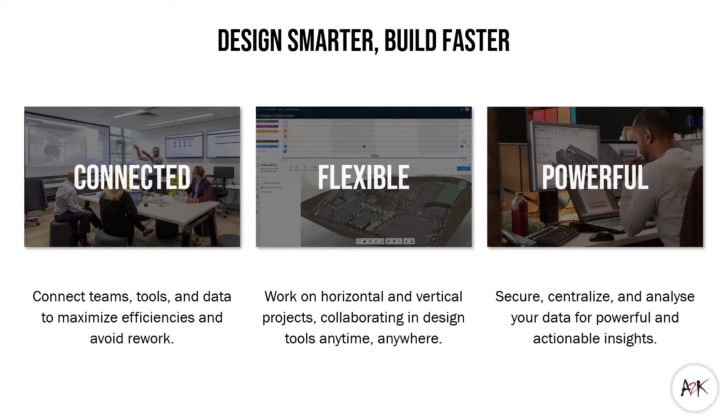Design data and BIM is in Autodesk's DNA, and they're uniquely positioned to extend the value of that design data throughout the plan, build, and operate phase, letting project data flow seamlessly across the lifecycle and making it available to teams in the right place at the right time. Autodesk's solution enables that connection to help companies move through the digitize, integrate, and optimize stages in the Autodesk Construction Cloud.

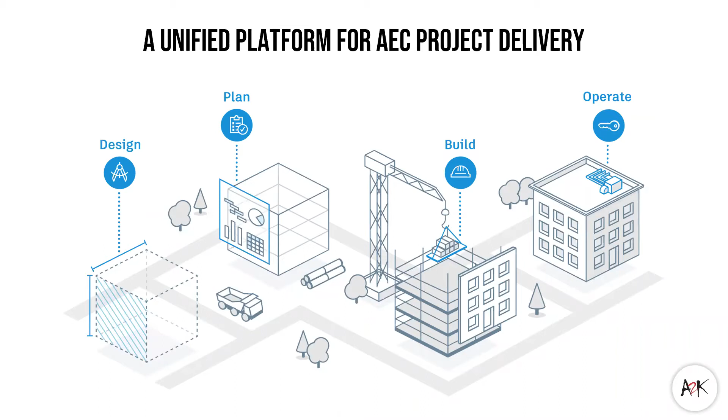And that solution comprises of several modules, connecting teams with projects and other businesses throughout the entire building lifecycle from design to operations. Our focus today is on BIM Collaborate Pro, which is part of the newer Autodesk Construction Cloud. But Autodesk also recently announced 3 new additions in the form of Autodesk Build, Autodesk Takeoff, and Autodesk BIM Collaborate.

Each of these licenses serves a different role at their respective project stages. However, they all coexist with common modules such as Autodesk Docs for document control, Insight for analytics, and of course, the administration. So let's now take a look at the features and workflows that apply to a designer using BIM Collaborate Pro, and later on also outlining what this means for existing BIM 360 design users.

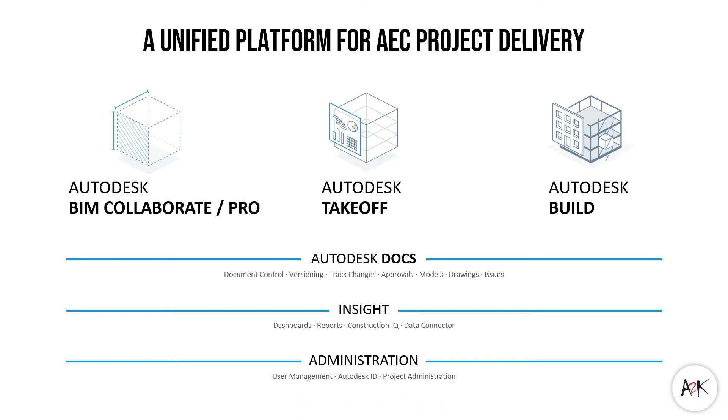So let's start this process by having a look at Autodesk Docs, which is for the document control. As we would expect from a common data environment, it is at the heart of the system that manages incoming document data for use in other workflows such as design authoring and moving it onwards for construction. Docs provides anytime access to document data so that it can be reviewed and actioned via ongoing design feedback.

As a common data environment, project teams often rely on a single source of truth to speed up the collaboration process and improve document control. This means applying a solid folder structure where documents can be published or uploaded if you prefer, protecting these folders with permissions, ensuring that data is accessed by the right users and at the right time, and never losing access to old document versions when newer versions are released.

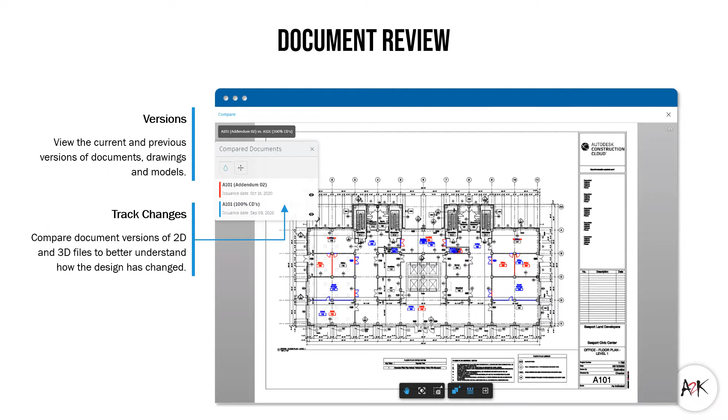And speaking of document versions, understanding how project designs change over time is critical to the review process. Both 2D PDFs and 3D models are tracked via version comparisons, meaning that project users remain informed at all stages of the design. If your concern is regarding accountability and ensuring that everyone involved on the project is completing their tasks in a timely manner, you can create issues and markups. These features enable you to pin issues in context, collaborate with common threads, add photos, assign work, and track open issues through to resolution.

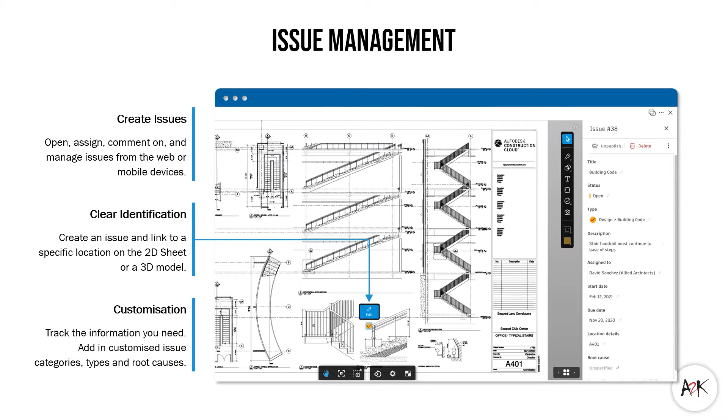All issues are centralized into a project-wide list. Using the search and filters, or just by simply browsing, this list affords an easier way of triaging the issues. And with access to reporting, those same issue details can be published to a PDF or even emailed on a recurring schedule.

Having a folder structure and permissions in your CDE only goes so far. To enhance this further, we use document workflows. Starting with approvals, this facilitates the submission of a set of documents to another user like a design or engineering manager for their review and approval so that the documents are first fit for use. Approved documents can then be released to other project users while rejected documents remain as is until they are resolved.

Transmittals create an official digital record that documents are electronically delivered to another user. These documents are typically those that are approved for use, so we can see the transmittals and approvals very much go hand in hand.

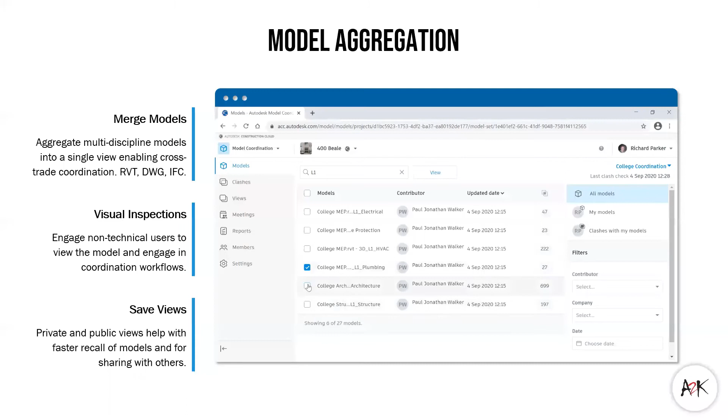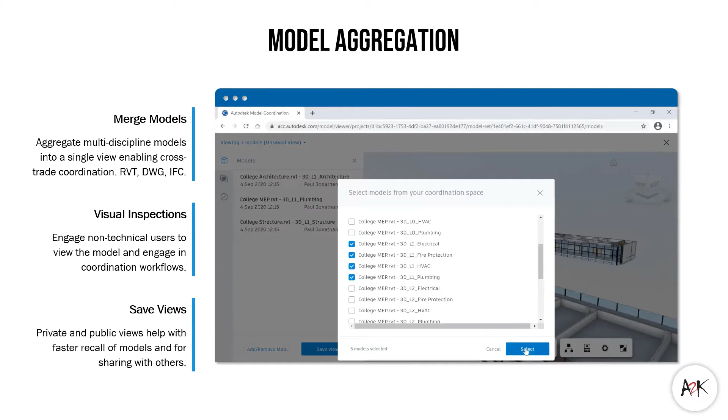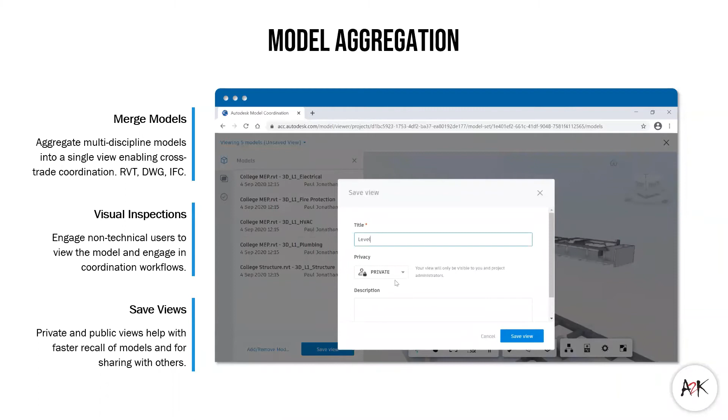These users can now visualize aggregated models from architects, MEP, and structural firms in one coordinated space. Navigate the model using zoom, pan, and orbit, and save views by model combinations or by levels. It now grants them the tools to essentially link models together, saving them as views which they can recall at a later time. They no longer have to rely on the design authoring team to perform these tasks for them.

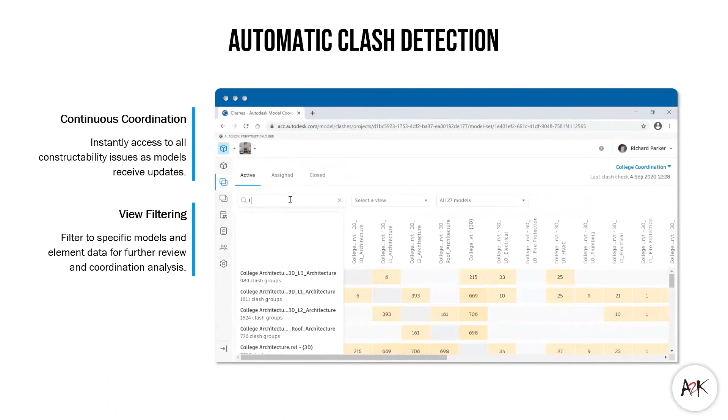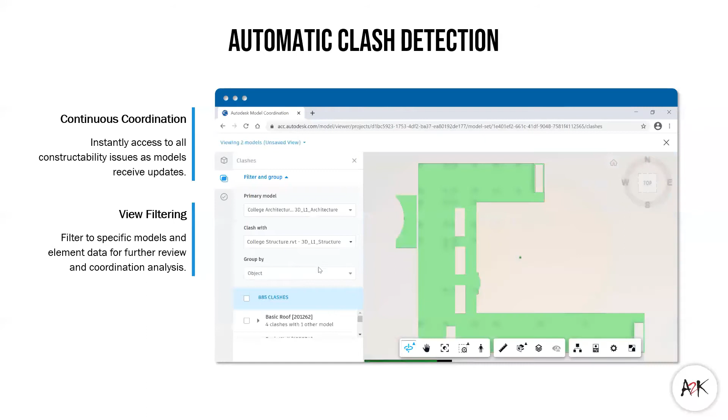It also grants these non-authoring stakeholders the power to participate in the automatic clash detection to check newly published models and visualize clashes in a matrix where they can then filter by models or saved views. They can use the clash matrix to drill down into specific clashes where they can raise issues that are assigned back to the design authoring team.

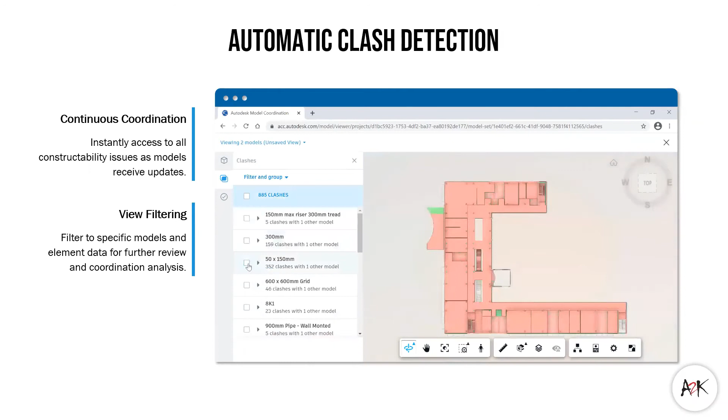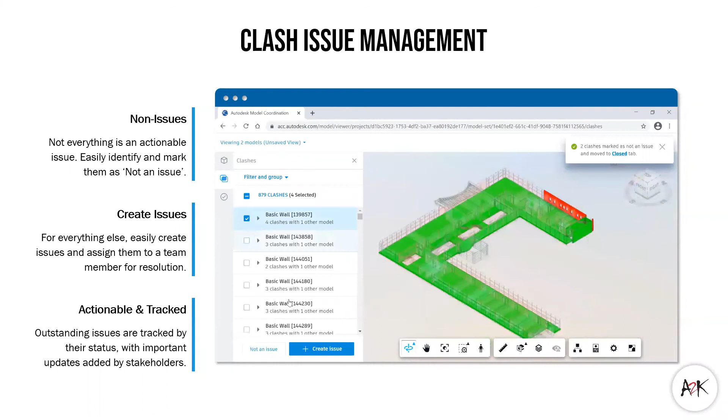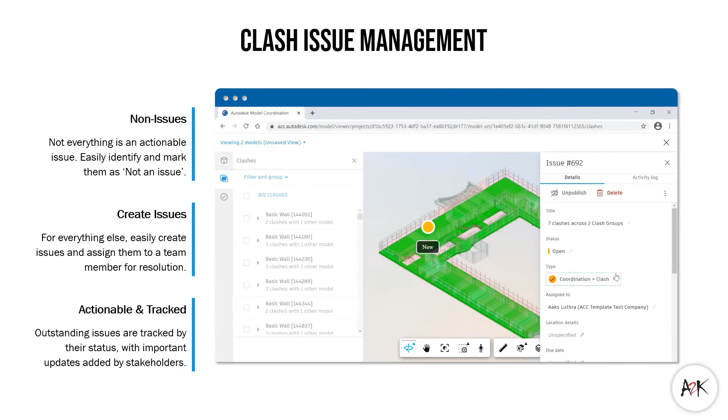And speaking of coordination issues, issue management is a key component to continuous collaboration. There's no need to wait for the next coordination meeting to assign issues to project team members. Easily tag clashes as issues, assign them to the appropriate stakeholder for resolution, as well as inputting a start and due date. Then later on, track these issues in the Insight module and follow up with the responsible parties.

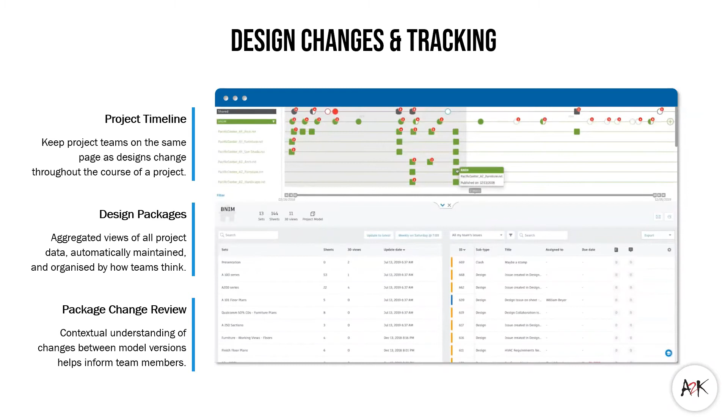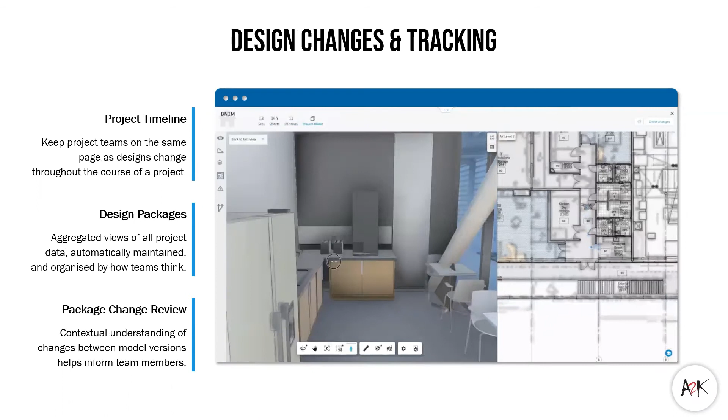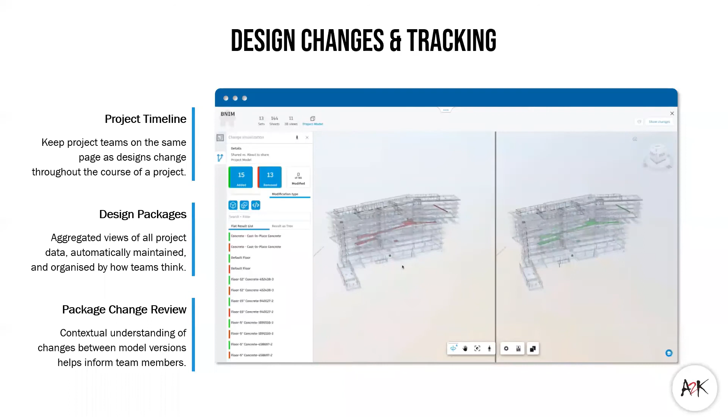But model coordination is not the only aspect that design reviewers need to monitor. As designs change throughout the course of a project, visualizing change and managing design iterations keeps project teams on the same page. Design leads from each discipline can package 3D views and sheets to share with the greater project team, ensuring clarity on what was changed and control over which designs are consumed.

Now we'll level up from BIM Collaborate as a license to BIM Collaborate Pro for the design team and their authoring process. So this is where I'll step you through the main differences and similarities between the older BIM 360 Design and the newer offerings. So to begin with, both BIM 360 Design as the older platform now and the newer BIM Collaborate Pro essentially still share the same common services.

Now, these are services that assist those design authoring products with their general design workflows, whether that means having a multi-user workflow for those that are using Revit Cloud Worksharing, or providing sequential access for those that may be using Civil 3D or Plant 3D.

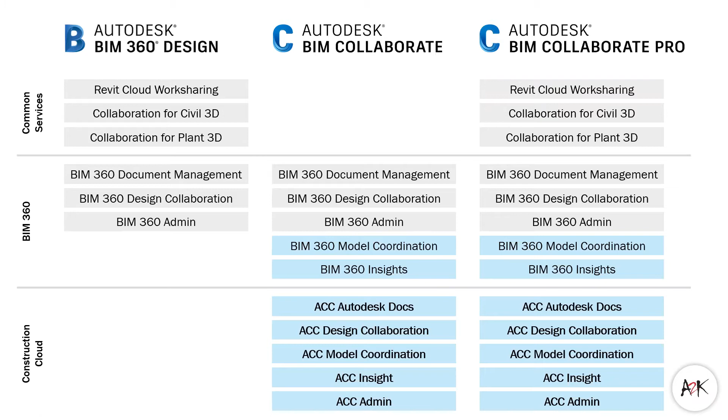Let's have a look at it maybe a slightly different way. So rather than listing out those licenses with the features, what about if we look at it just in regards to designers, those that are authoring the information, and those that simply need to review it? This simplifies the approach, where we can see the designers come in at the BIM Collaborate Pro level, which integrates with their authoring tools, either Revit, Civil 3D, or Plant 3D.

For those other people that are just considered reviewers, they can come in at the Autodesk BIM Collaborate level. And we saw those features before, where they can now review the design authored information. And also something we haven't touched on, and won't touch on moving forward, is the fact that the AEC Collection as a product suite also now includes a lower, more entry level, being Autodesk Docs. And that'll simply provide access to the CDE so that they can access documents.

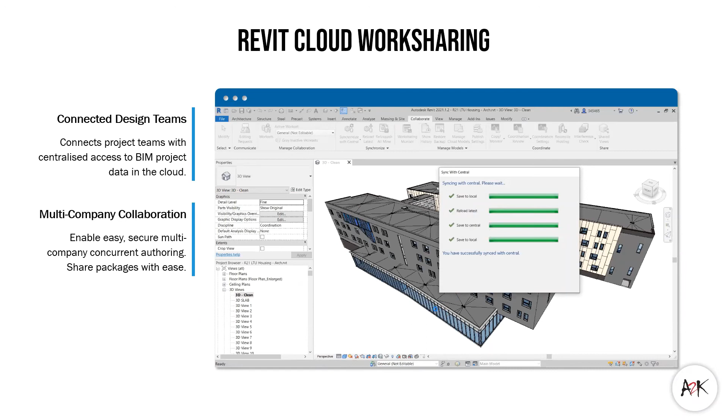We've heard recently that in the near future, Autodesk Docs will also be available to purchase as its own entry-level license. So BIM Collaborate Pro adds powerful Revit Cloud Worksharing technology that enables real-time Revit worksharing virtually anywhere, even with the most modest of internet connectivity.

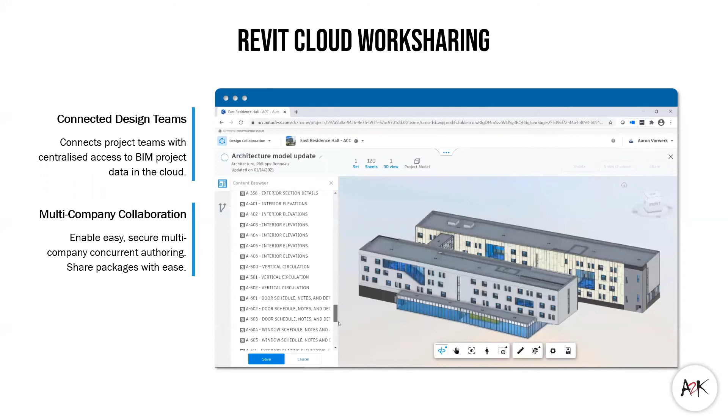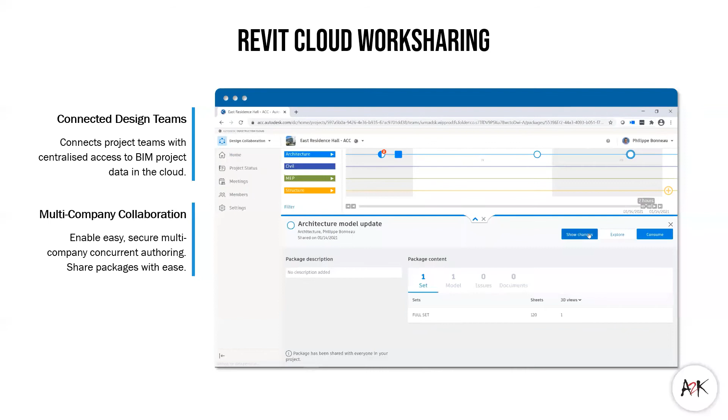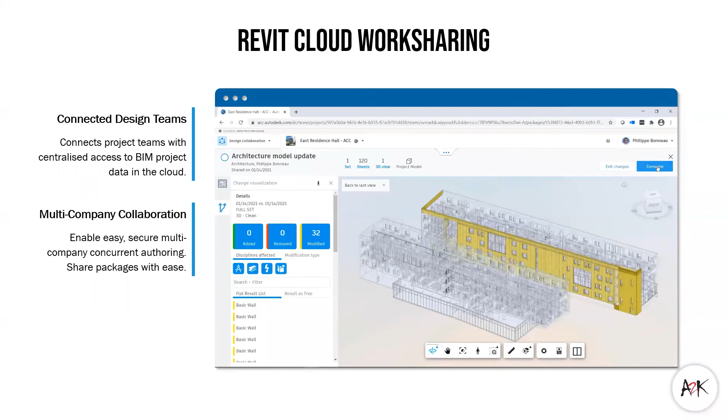Revit models are synced to the Construction Cloud platform. From there, files are packaged and shared to other design teams. This can include both models and sheets, depending on what needs to be shared. Those other design teams then view the contents of the shared data and then optionally consume it into their own design workflow. This process ensures that design files remain on the platform without needing to be constantly downloaded and uploaded.

And for both Civil 3D and Plant 3D, the design integration follows a simpler workflow. Both design authoring products connect natively into the platform, ensuring users are working from a single source of truth, with automated file locking that helps to control sequential file access.

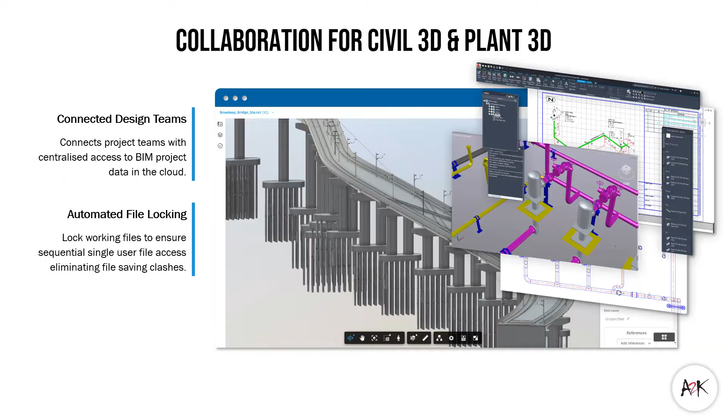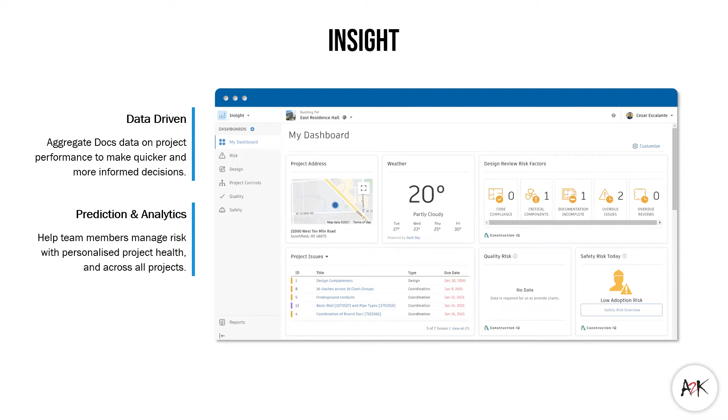All right, so we're going to take a brief live overview of some of these features. With numerous attendees online today, I'm sure that there are going to be many that have never seen the newer Construction Cloud or even the old BIM 360 workflows. So some of this hopefully should be some good new information to get you introduced to these platforms. And for those already on BIM 360, this will no doubt give you a better feel for some of the subtle differences that come with the Construction Cloud.

So I've just changed over to my web browser. I'm running Chrome, because both BIM 360 and the newer Autodesk Construction Cloud are very much browser focused. I've got a range of tabs open across the top with some other features that I'll get to in a moment. The first thing that we see when we log in is most likely going to be the document management space. That is Autodesk Docs. This comes with the AEC collection with BIM Collaborate and BIM Collaborate Pro.

We can see our menu system on the left-hand side that gives us access to a range of other features if we choose to use them. But the crux of Autodesk Docs is going to be regarding the project files and their folders. Here we can see that we've got a customized folder structure that I've already created for the project. And within one of these particular folders are some working folders and corresponding files. Here underneath the architecture working folder, we can see the architectural Revit file, and the same would be underneath the services and structure.

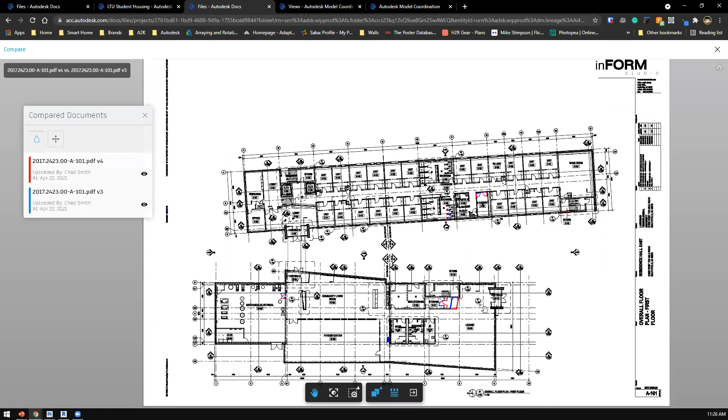I have one of those drawings open in a different tab here, this being just a PDF, not a Revit model. But we can see here that when the two versions are selected, those changes are highlighted by way of the red and blue line work on the screen so that we can understand what changed between version 3 and up to version 4.

If this was a 3D model, on the other hand, not only would we be able to see the changes, but we would additionally be able to see how things have changed, whether elements were added, whether they were removed, or even if they were modified. And not only if they were modified, but how. Did they have their data changed? Did its location change? Or maybe its shape was changed. So both 2D and 3D share a very similar design comparison process.

Let's close that. Now, coming back to my document space here, where we're interacting with our 2D and 3D information as well. One thing that I didn't previously show you was when the design teams were sharing their designs between each other using the design collaboration module, they are doing so in this shared space. And again, this is another location where designs are released so that they can be consumed by other design teams. It's on this particular folder here with its subfolders that I've previously set up what we call a coordination space. And this moves us into the model coordination process.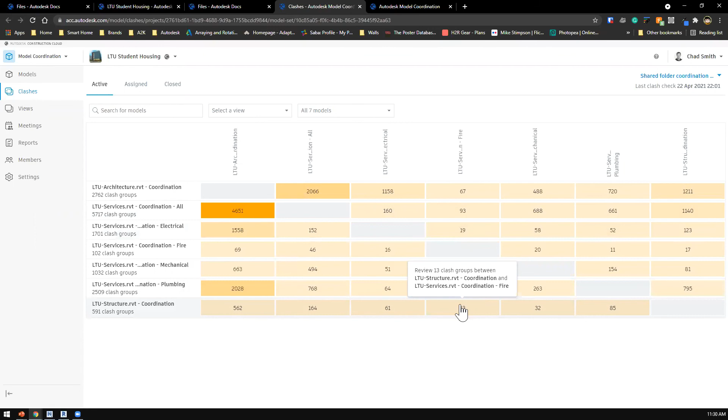I'm not going to come into the models by way of this matrix because I want to show you one more tab over on the left-hand side here, which is the Views tab. Remember I mentioned a moment ago on the Models tab that we could put different models together. Well, those different combinations we can ultimately save as a view so that we can recall them far more quickly than having to select them time and time again.

So I'm going to jump into the structural and mechanical view, which has those 2 models saved together. Now we just need to give this a moment to load this particular view. Oh, hang on. In fact, do I still have it up? I still have this open on this other tab here, so that's good.

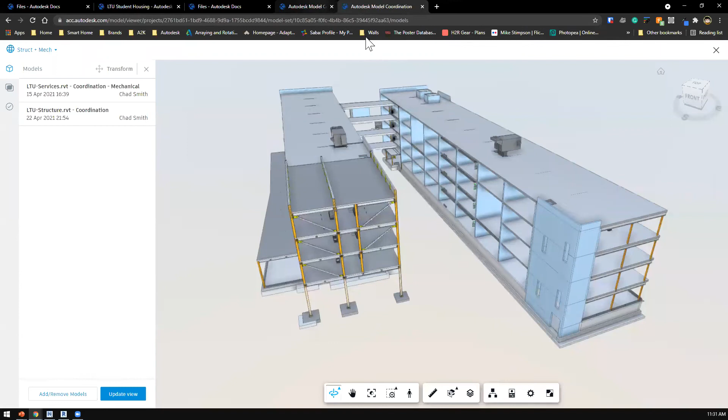All right. So here is a preloaded view of both the services and the structural model. This gives us both of those models overlaid so that we can at least do a visual inspection. Now, remember, previously I said that this is available to the BIM Collaborate users as well as the authors who are using BIM Collaborate Pro.

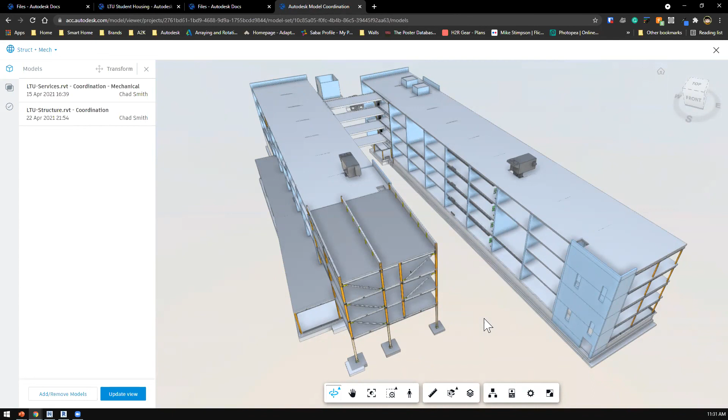It too provides us with a list of actual clash results, which we can then use to move through and identify where these clashes are occurring so that we can ultimately select them and create an issue, which can then be assigned to the responsible party for resolution. Again, this page is probably just timed out because it was preloaded.

Any coordination issues that are raised then fall under the global issues list so that the entire project can review which issues have been raised. Now, one of the nice things about Construction Cloud is its integration into both the design authoring process and the model review process as well. So since we're here on the clash results, let's jump over and have a look at Navisworks.

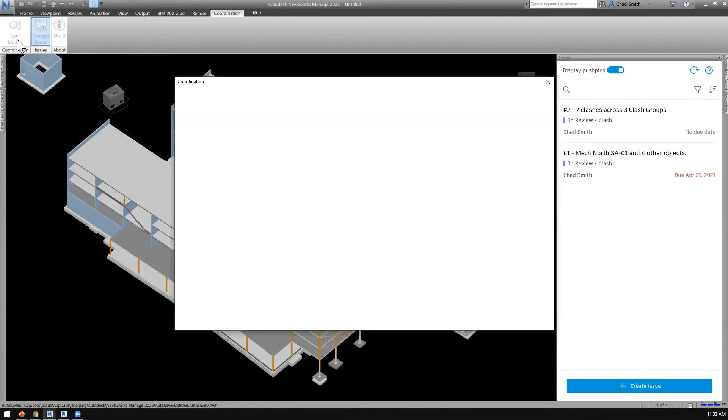Navisworks, with an additional add-in installed, gives us access to firstly open models directly from the Autodesk Construction Cloud. Now, I'm just going to give this one moment to load, and here is that same project that I have open over in my browser. And we can see those same models that I can select, just as I did a moment ago. They also contain the views that we can use as a quick selection to open, of which in the background, I already have the structural and mechanical opened.

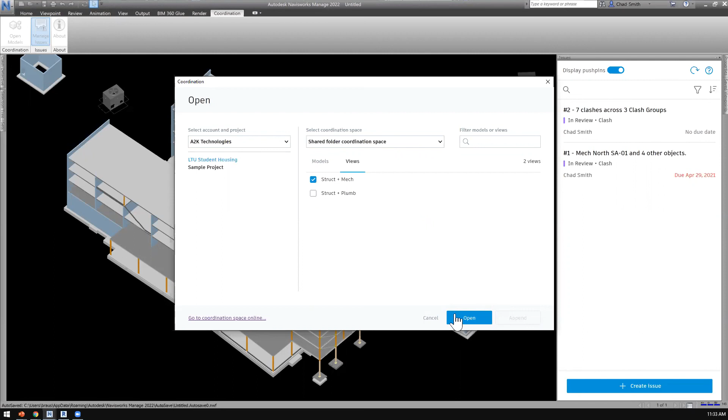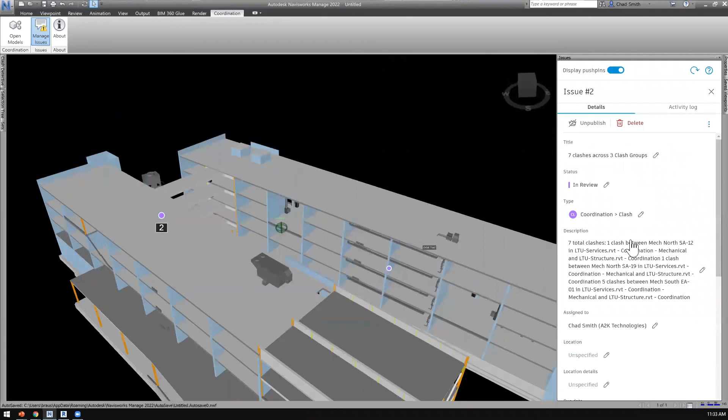And now with the issues panel open on the right-hand side, we can see where those clashes are occurring. We can select them from the issues panel, view the details, and if we do reach a point where this issue or this clash has actually been resolved, then we can go ahead and close it out. It's just a way to bring that clash information from the web browser through to a desktop design review tool like Navisworks. And this also includes the design authoring process as well.

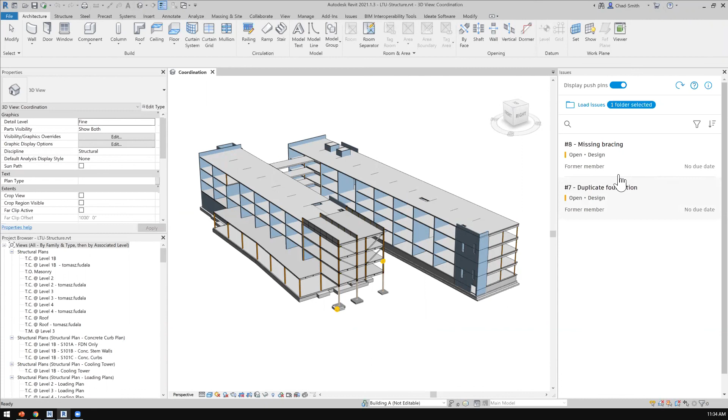So here is Revit, again, with the structural model open, and with the BIM 360 or Autodesk Construction Cloud add-in installed. In this case here, we're simply looking at design-related issues, not coordination issues like we did a moment ago inside of Navisworks. Again, we can see where these issues are by the markers on the model, and we can go ahead and select those issues.

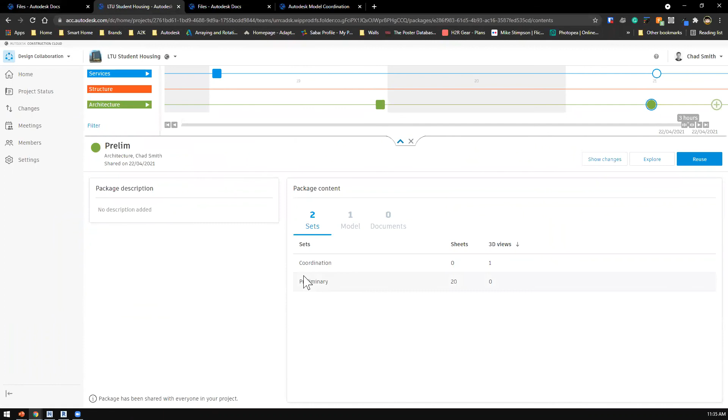Just didn't quite center it in the view for me this time, but it'll get pretty close to where that issue is, where we can review the information, and we can deal with it rather than going back over to the web browser. So we can see here that we have almost a round trip process, whereby the documents are uploaded into Autodesk Docs. They then use the design collaboration module to work between different consultants. Those models are then coordinated together, with any issues raised anywhere throughout that process then being accessible in our design review or authoring products.